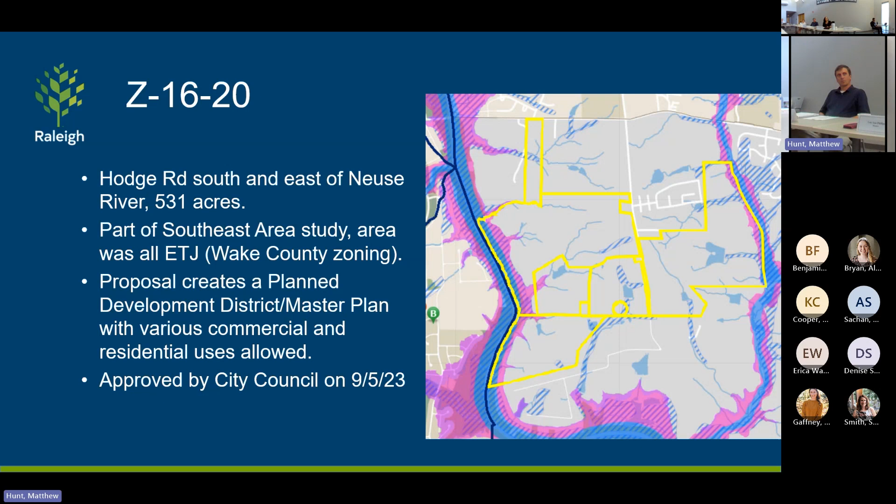The next one is kind of a get-ready-for-the-future type thing. This is gonna be heard at the September 26th Planning Commission. As of now that schedule's not locked in, so it could be out farther, but it's not gonna be any sooner than September 26th. Did I say November or September? September 26th, Planning Commission meeting.

This case is interesting because it's 2 lots, but they're looking to develop together. It's got an old master plan on it from the 90s that shows an 11-lot single family subdivision. This came in 2021 - some of you may recall, we weren't doing these updates like this, but you may remember it. They were looking to develop this more densely, like an R6 issue here. This property is almost entirely floodplain and undeveloped, so they would not be able to get into any of the floodplain area.

With their 2021 application, they were looking to cluster development on this lot. But what they're running into is that the adjoining neighbors, who are not very dense - technically in the ETJ, not in the city, more of a one house per acre development pattern - were not happy about the clustering of R6 townhomes right here, especially this neighbor, which visiting their lot, I can totally see why.

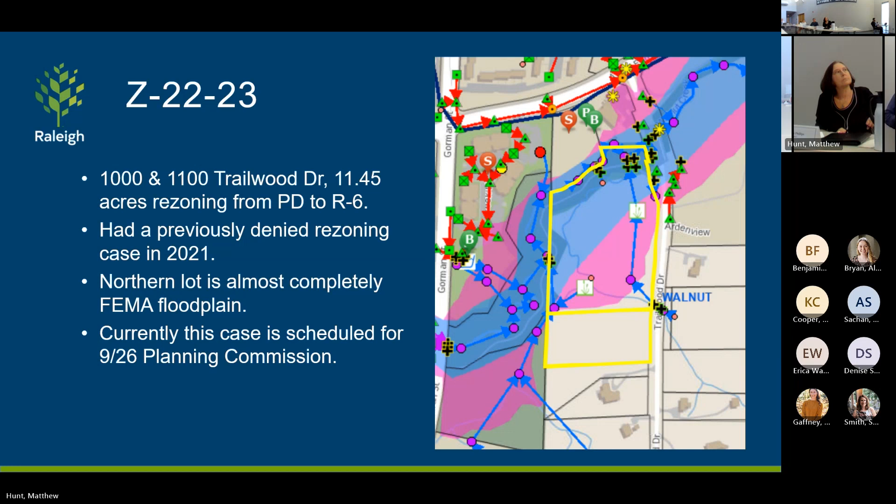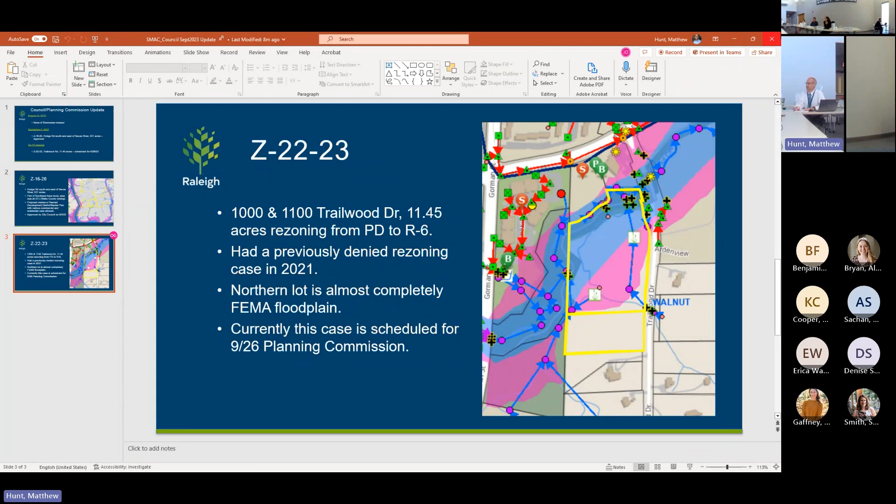Good afternoon, Commissioner. Pleasure to be here this afternoon in support of Wayne and the team. In terms of stormwater staff updates, none to report today, but we hope to bring you good news next time. We have some roles we're in the process of filling as we continue to grow the team and support community stormwater services. Look for those next time. In terms of high priority topics, we've got several items.

I'd like to start by introducing Satwana Purtle, who is here today. She's our new City of Raleigh Emergency Management Director in the fire department. Thanks for joining our team, Satwana. We'd like to bring forward awareness for the commission about the Wake County multi-jurisdictional hazard mitigation plan, which is about to kick off, and we're going to be a participant in this. It's led by the county, but the City of Raleigh and other municipalities within the county are part of that plan. Satwana, I'll turn it over to you for any comments. I think you and your office will be leading that for us, and we'll be supportive of you and the team on that.

Thank you. Hello everyone, my name is Satwana Purtle. I'm the Assistant Director of Emergency Management for the Raleigh Fire Department, and thank you for having me here today. It was brought to my attention that Wake County is in the process of updating their hazard plan. So I reached out to my counterparts, since Wake County has emergency management counterparts, and the information I received is that they did receive a grant to update this plan. They're currently running that information by the state, which is determining how to spend those monies. Once we receive additional information from Wake County, we'll move forward with that process. I identified a couple of points of contact from the Office of Sustainability and our stormwater counterparts to update Raleigh's portion of the plan. If we collectively believe we should incorporate different departments, we'll reach out to them at that time. Additional information should be forthcoming, and I'll look to further collaboration with the team.

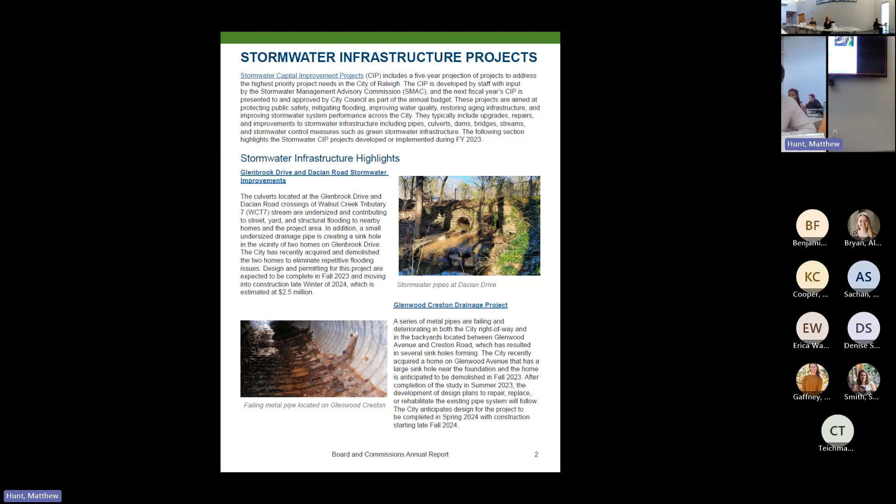So we're here to take any comments first on the annual report for FY23. We can kind of walk through that. Matt has pulled it up for us. Thank you, Matt. So we highlight some of the major projects over this last year. As you can see here, I won't go through those in detail, but we can take any questions on those if you like.

Continue to identify a number of different projects, infrastructure, as well as lake projects. This is the one in process right now, the conversion of the Upper Durant Lake to a wetland system. As we talked last time from Camp Pond, this is Upper Durant, and it's going to be converted from a lake to a wetland. In fact, this was the very first project under the new Lakes policy.

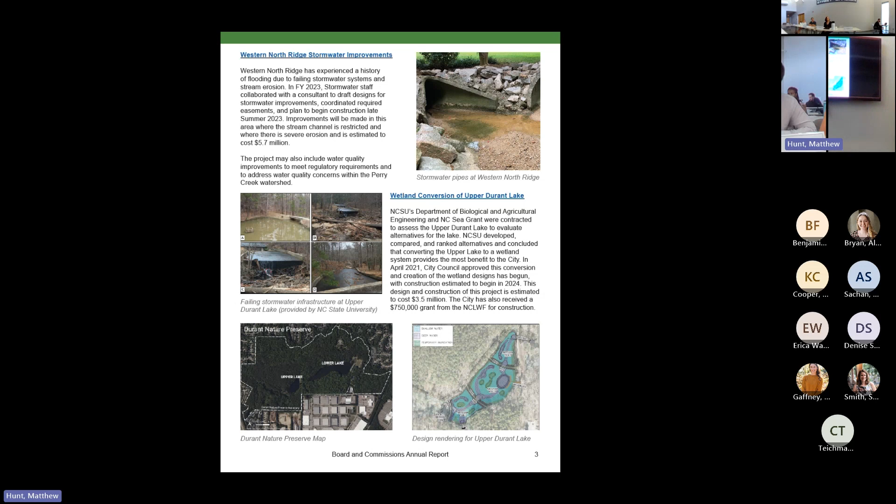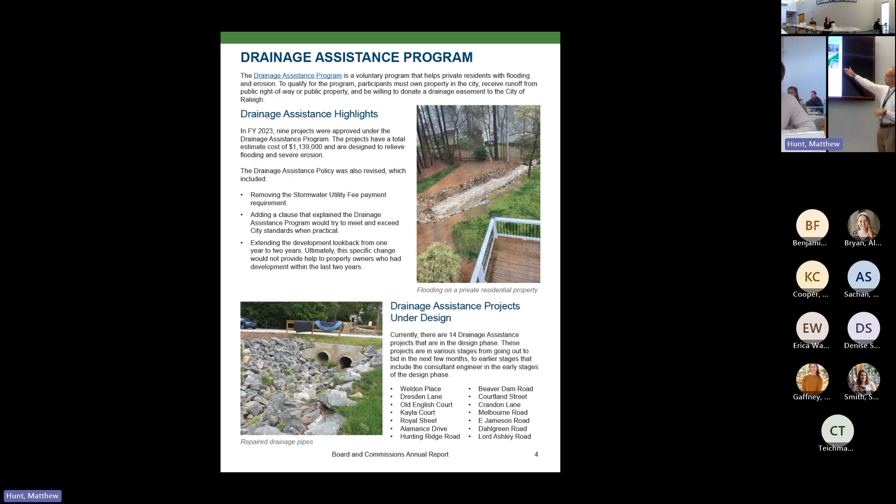The drainage assistance program, of course, we're going to hear about some more projects today from Chaz. That's ongoing good work there, many projects that we're designing. A very new stream stabilization program policy was just approved during fiscal year 23, I believe, Chaz, and the first set of projects there are coming together.

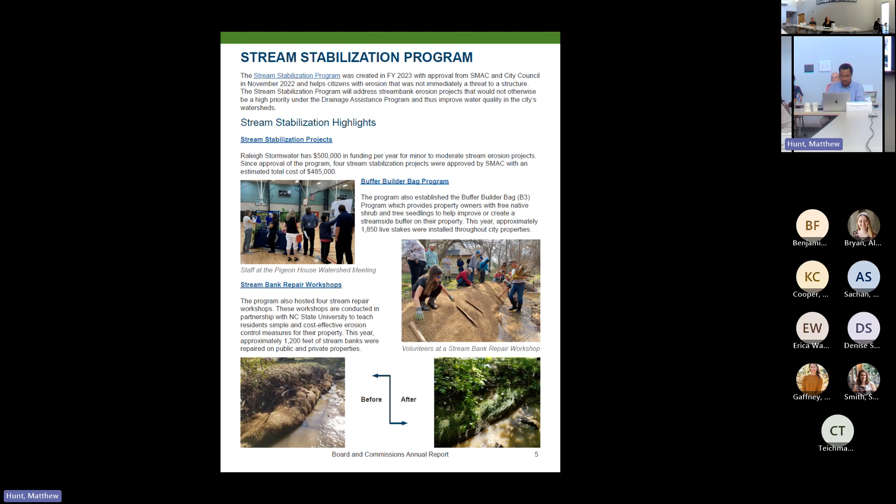More exciting programs here, the buffer builder bag program - say that three times - and stream bank repair workshops. Ariel has really done a fantastic job here with before and after visuals of several of our situations that really are visually impactful. I know a lot came from the water quality team. Hey, Heather, a lot of great water quality work, GSI.

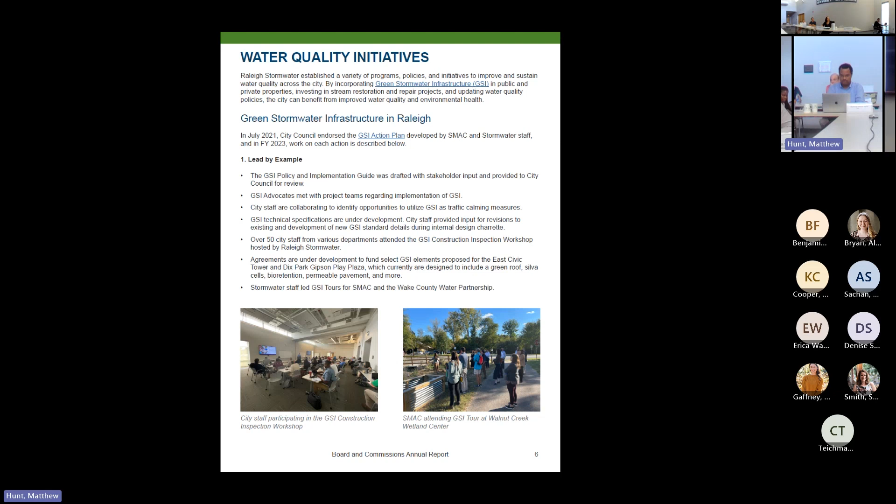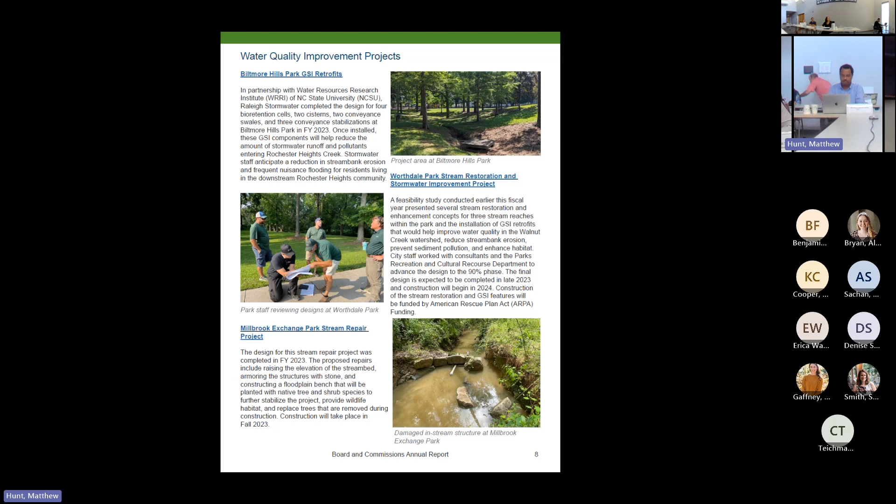Here's the picture of the GSI Tour at Walnut Creek Wetland Center during fiscal year 24. Many items there, we can kind of move through this, but a lot of GSI related water quality work. I hope what you see is one theme here: the integrated program is what we're pursuing - water quantity, dealing with flooding hazards, water quality, GSI emphasis, equitable emphasis across our program as well, and all these services that we're doing.

Another excellent before and after example - we'll say this is after here, so this is a rendering. So if we were projecting this, it's going to look like this or very close to that.

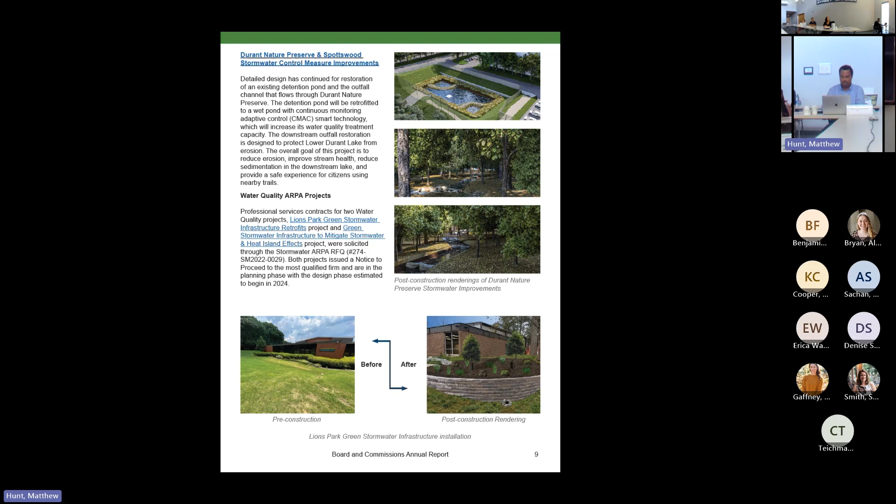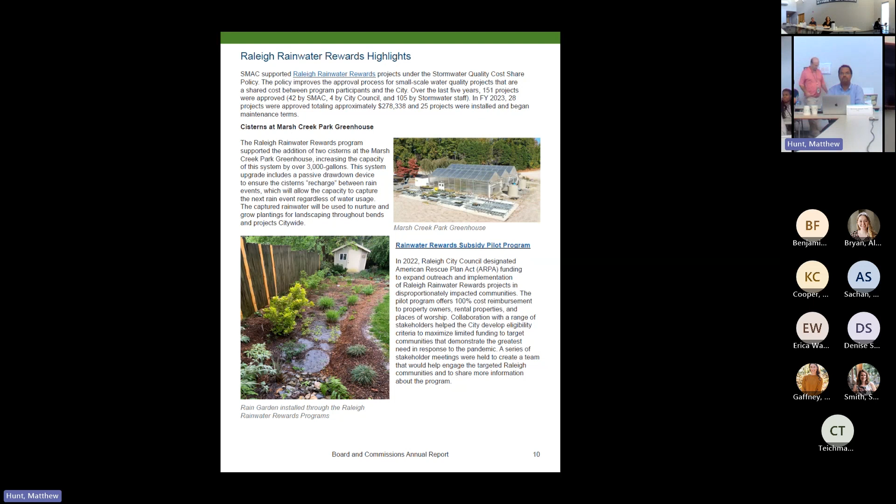Raleigh Rainwater Rewards - again, this continues to be a very well-received program, but we're also getting interest from others outside of Raleigh about this type of program. Even as far away as Tempe, Arizona is asking about it. So really an excellent program for Raleigh Rainwater Rewards.

We do have still what we consider a modest stormwater utility fee that supports all of this. That's the section around the utility fee, and it was adjusted slightly for fiscal year 23.

The Alluvial Decoder on Crabtree Creek there really raising the awareness of flooding hazards, in this case for Crabtree Creek, but a very well received display out there near the Crabtree area.

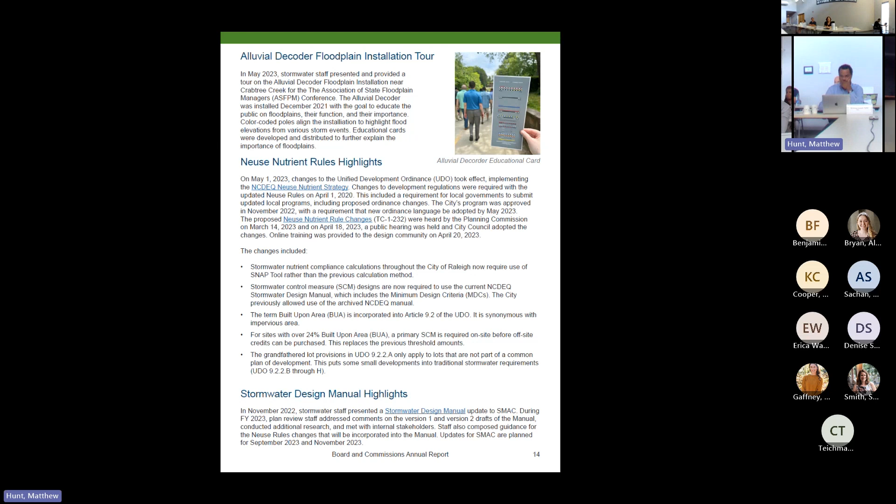Before and after here, some of the great work in managing stormwater control measures around the city. The city improvements here we're making.

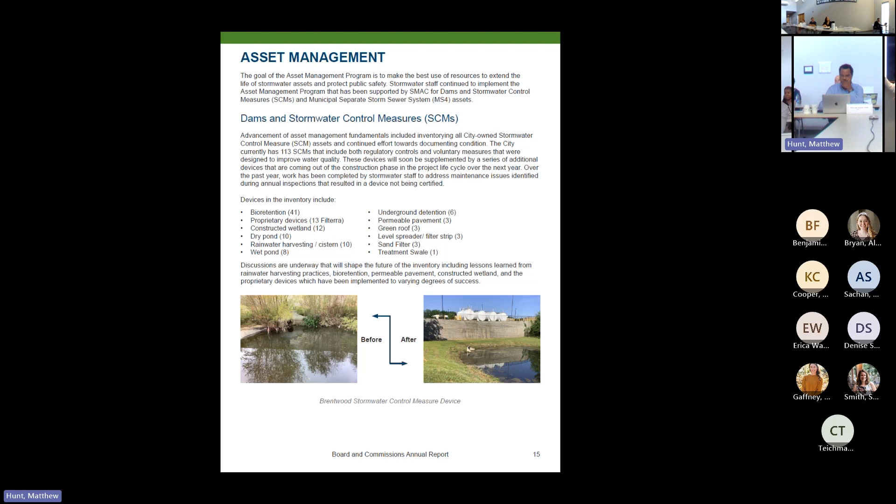All right, MS4, municipal separate storm sewer system. Let's go through that one.

Asset management, doing a lot with identifying what these assets are, what their condition is, and prioritizing the repair work, and trying to make those repairs at just the right time, not too early, not too late, but just at the right time. That helps us to make sure that it's functional, first and foremost, but also optimizes the cost for our assets. A lot of great work by the asset management team.

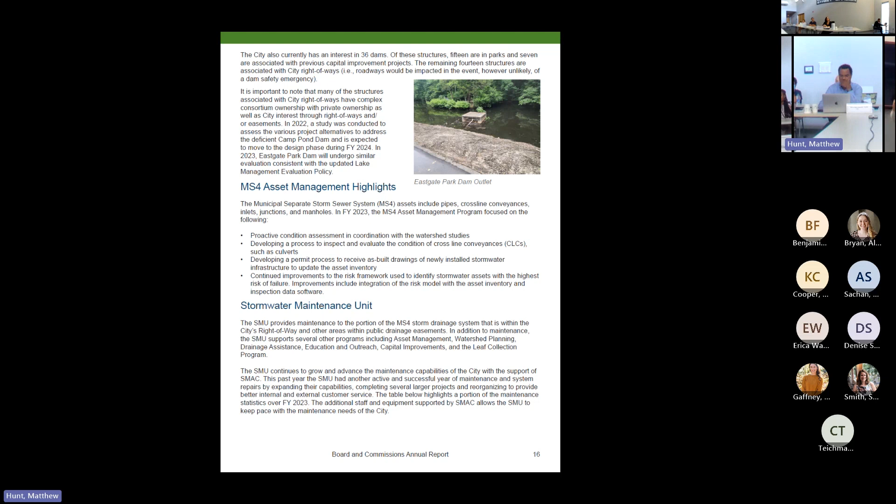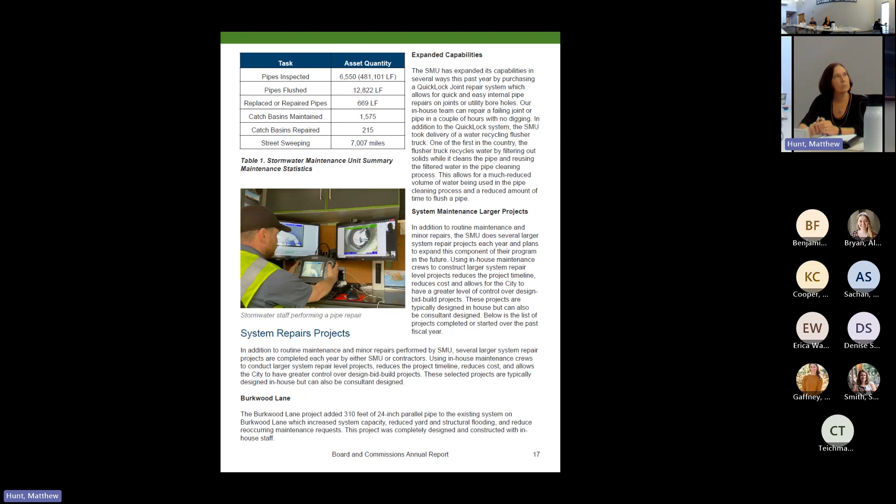Of course, our stormwater maintenance partners housed here in this facility, doing a great job with all of their equipment and their assets to repair the system and maintain the system. Thank you, Matt. We're just scrolling through this, perfect.

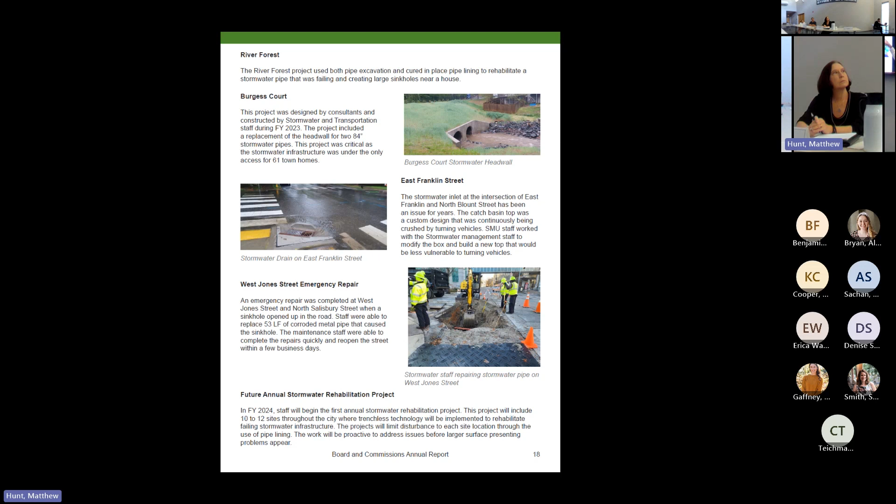Part of our team, watershed planning. A lot of our work in engaging residents in the community about what we can do over time to make improvements. A lot of really good engagement taking place there.

Education and outreach. Lots of education and outreach. We really want to highlight the commission's engagement in all of that work.

Schools, internship programs. You heard from Alex Lynn, our most recent intern for Partnership Raleigh. The cohorts are featured there in the 2023 program and really just doing a great job of intern support, and our commission. So we'll have an updated photograph after the meeting, if that's convenient for you all, we'll get that inserted here. Comments on the annual report, anything that we missed, or do you like the way it's presented?

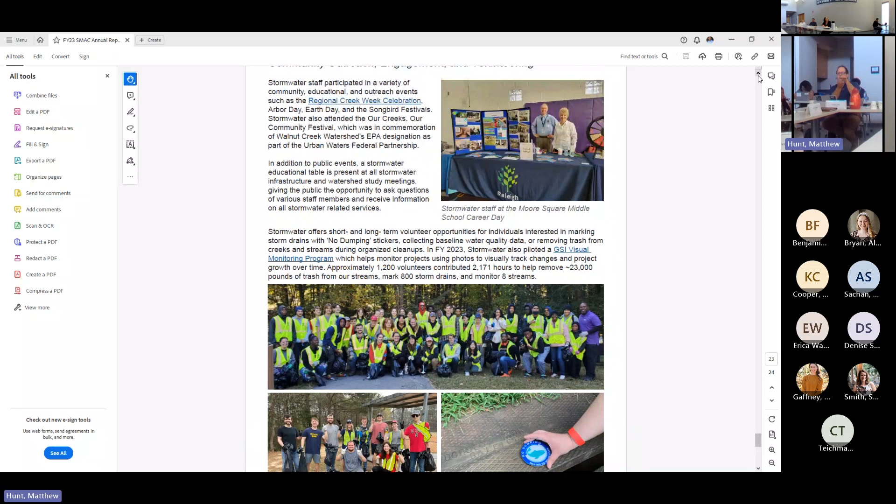This is excellent, you've done great work here. I get lost in it a little bit, there's so much good stuff in there. Is there a table of contents, or a way to group that? Like at the end, it's board of commission members, internships, and rain barrels - but are they as important as water quality and drainage system? So trying to figure out how it's all clustered, give me a direction in the front, a table of contents, so I know what I'm seeing and don't get lost.

It could be like a two-pager, just a table of contents with those pieces in there. I think that's great feedback. The template we're working from is a general citywide template for boards and commissions, but we have flexibility to make it fit SMAC's desires. I think that's a good idea too.

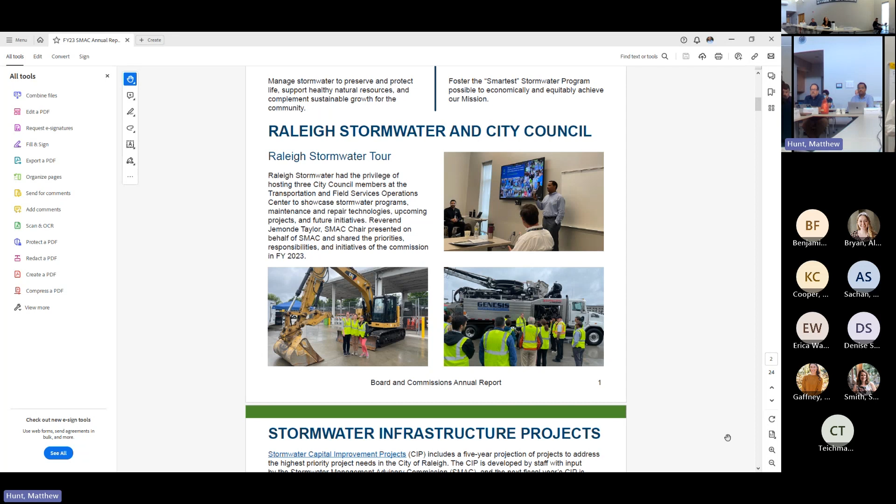So we'll work on the table of contents or some other way to orient the reader to the document, because it is a pretty significant document - it's 24 pages, significantly longer than last year's, and with a lot more pictures. Yeah, I'm on page 12 and I'm like, where am I supposed to go?

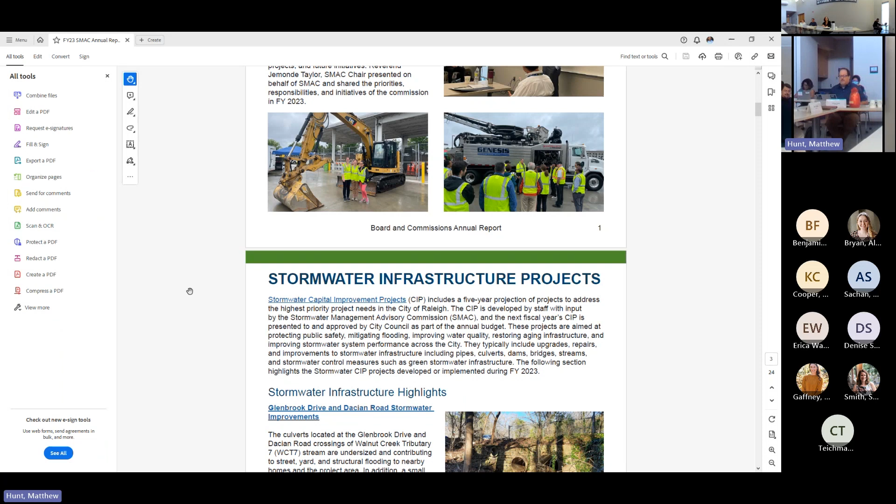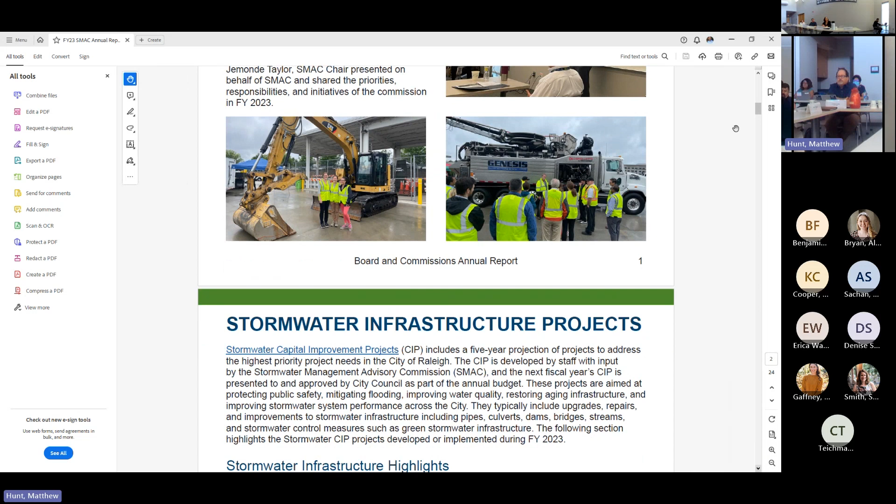That's good, I'll definitely have it. There's great suggestions, we'll make it even better. Other comments - the goal of this was to make it representative across the entire stormwater program, all the activities of the commission and across all of our programs. It'll definitely be better to give some summaries of the total picture that y'all mentioned, and orientation to where items are.

Great feedback, outstanding job there. So much work - take a couple years off! This is a great area, thank you for leading that. It's a pleasure to be part of such an effort.

It's guided by commissions. I just want to add, as a new member, this was super helpful for me to orient to all the things going on, and I can see how much work - visible and invisible - is happening. So thank you. One thing that stood out to me as potentially an area for growth, and I know a lot of attention from all of us is going towards it,

is making that equity framework visible in the other pages that aren't just the equity page. I think the equity page does a beautiful job outlining the plans and next steps, especially with the Raleigh Rainwater Rewards. But it'd be great to see that attention to equity in the other programs too, whether it be project selection or community outreach - showing up in places that aren't just on that one page. But I think that's room for growth, and it was fantastic. Thank you.

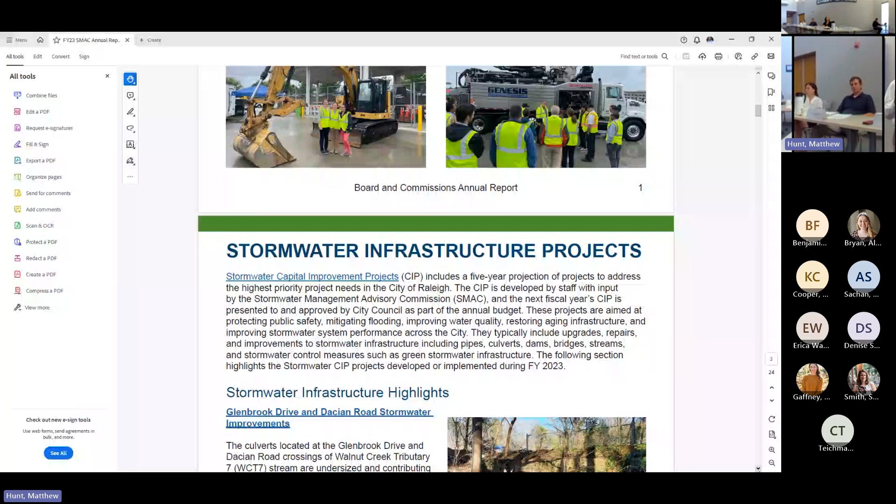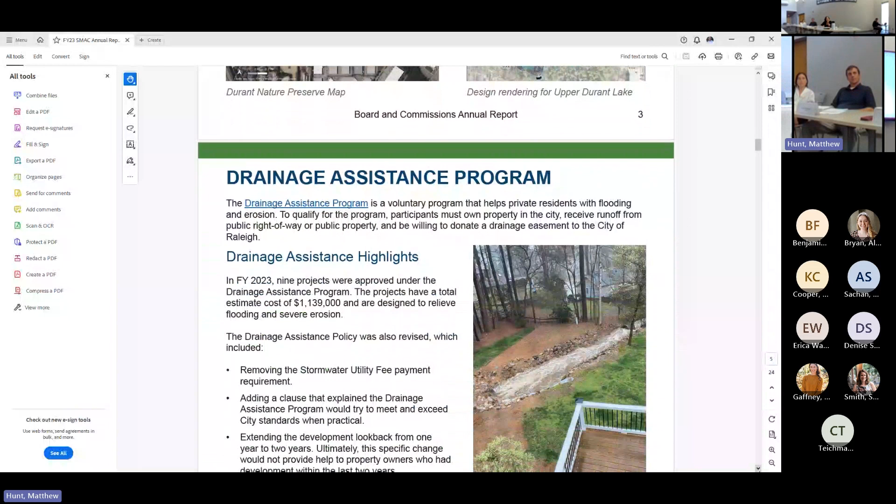Other comments? We will work on those revisions and improvements and send you all a revised draft as soon as we can, and put that over email. Ariel, this might be ready by tomorrow morning, or maybe next week.

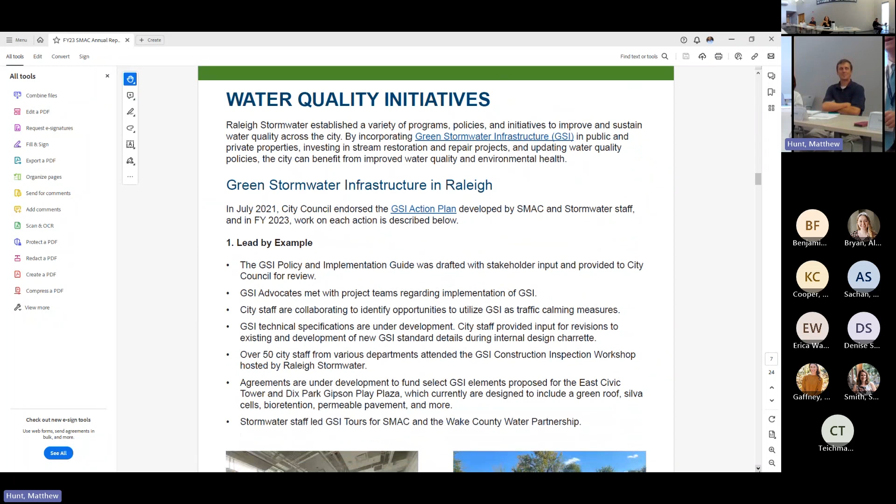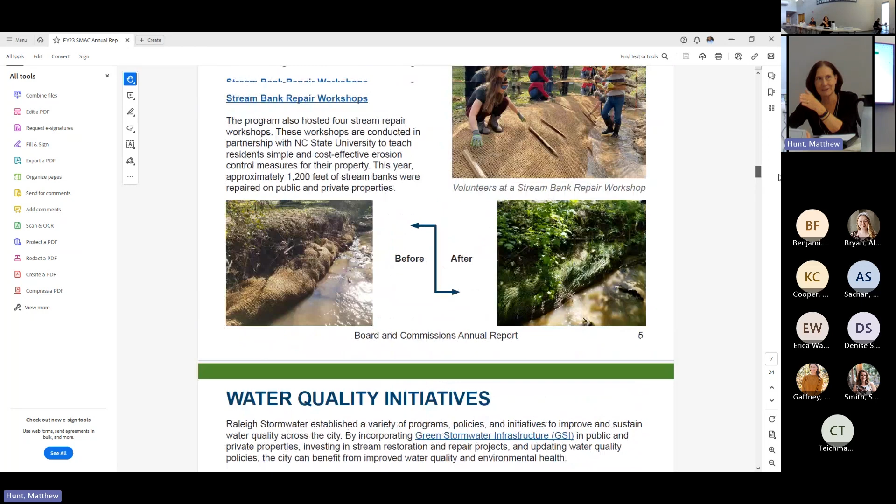I did have another thing, where you were showing the statistics on the maintenance unit. Those are impressive, but you could show the previous year too, to have 2 or 3 columns and show improvement. That would be great to show trends.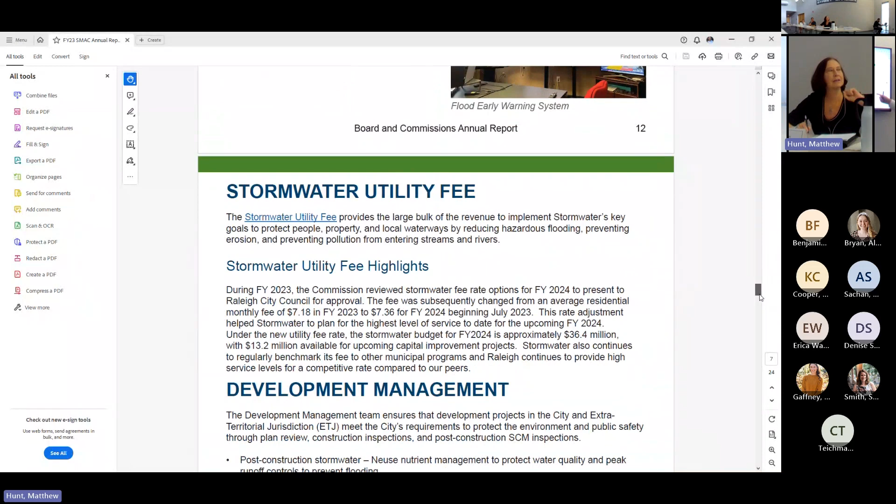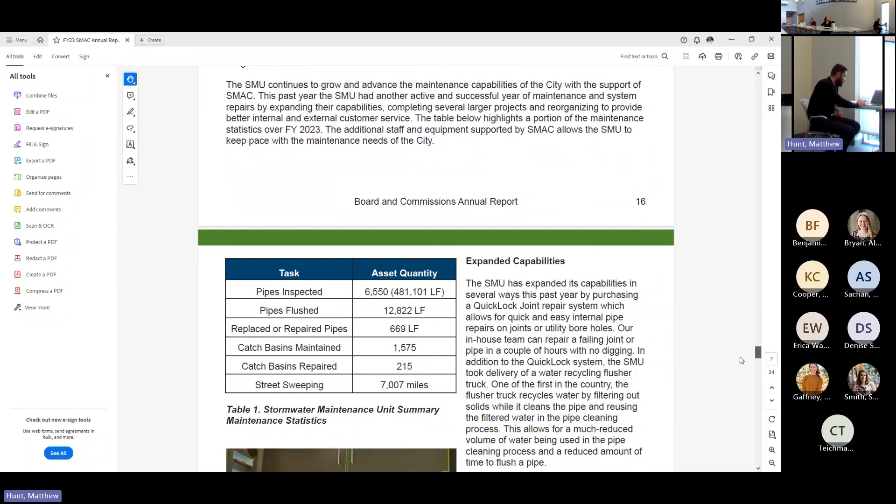Yeah, we've got essentially all of that on page 17, I think. Our maintenance team, we should be able to pull that from Cityworks. Yeah, it's like our summary of work over time. Yeah, the information right there is great.

I'll definitely add it, thank you. We're very good to work on that. It's wonderful to show these trends, and we could even incorporate that over time for all of our programs, if you'd like, to show improvements and trends.

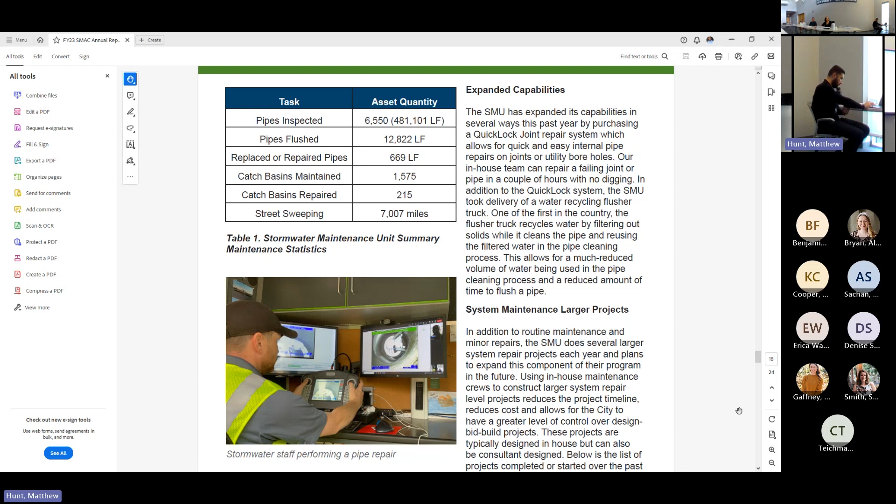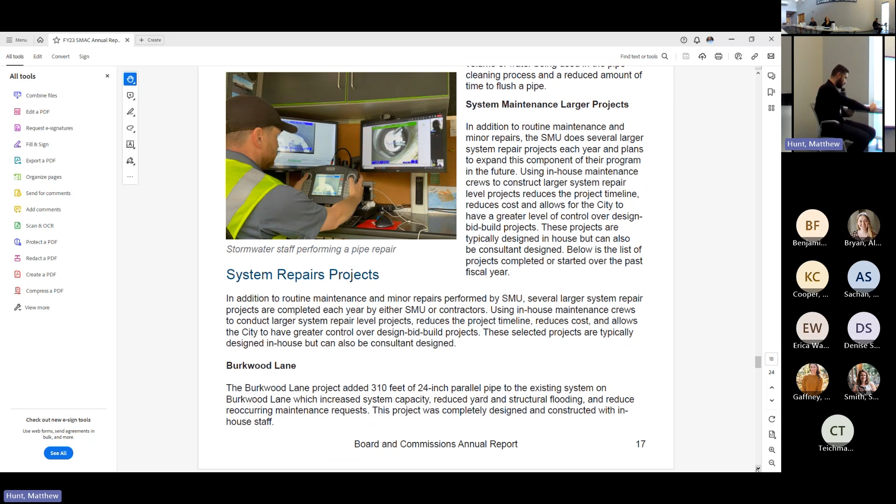And as we capture more nitrogen, for example, how we're doing that over time and reducing flooding hazards, things like that. We've got a number of those items in our key performance indicators for stormwater, which we may want to bring back a presentation on in the future, and we could include that here.

I think that's an interesting way to go, somewhere at the end of this. It ties into the city's overall climate action plan and all these things. If you're tracking certain performance indicators, you could put some cool page graphics, a stormwater-focused tear sheet a city councilor can take, with conversation pieces that show what we're doing as a city around this.

Thank you, we're planning for that. We do have a pretty broad set of key performance indicators for stormwater that rolls up into our departmental business plan, and then that rolls under our City of Raleigh strategic plan. That's all connected together.

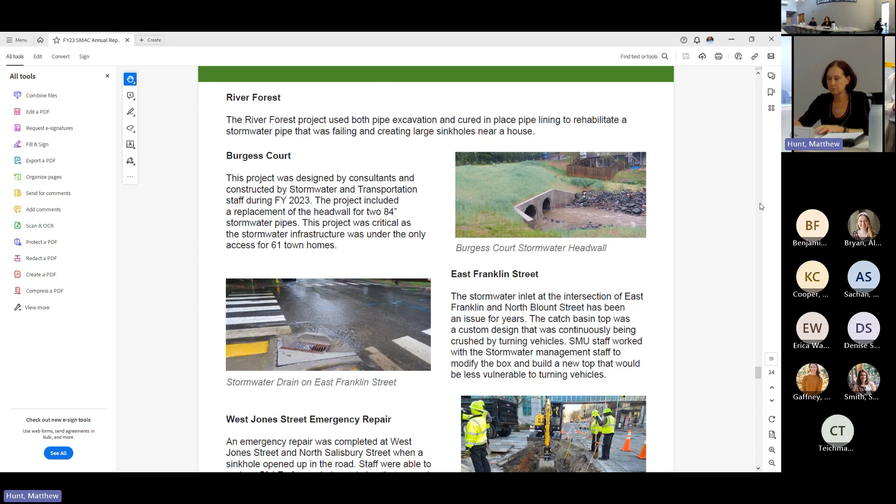We'll move now to the annual work plan, looking ahead for fiscal year 24, which we're just into now as of July 1st, and we're already off and running. Some of the things we're proposing to put into your FY24 work plan, you're already working on, so it's work in progress. We'll do the same thing here.

This is very much just a first draft. Wayne and the staff team's ideas on initiatives that we knew were already important to the commission, as well as things we were projecting for the next year or so. There's one new section to this work plan, two things actually new.

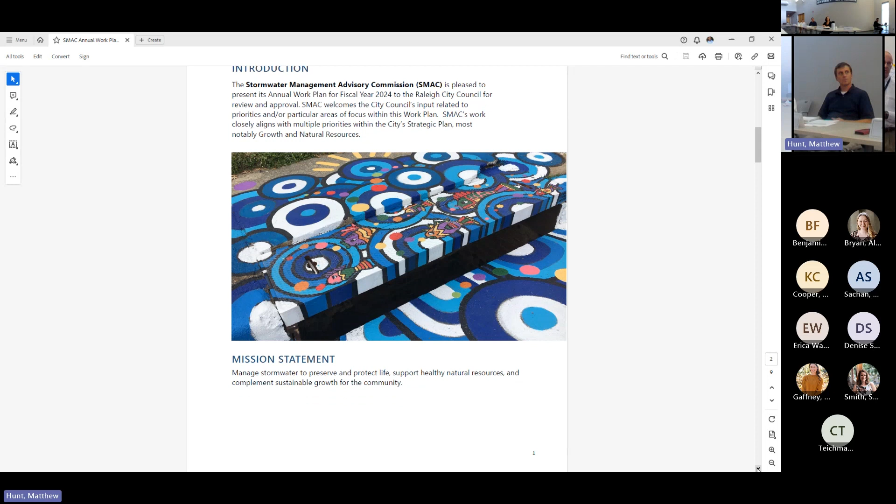With Errol's help again, we have a template from our community engagement office, so we have a new template for the look of this work plan. That's number one. The second thing we'd potentially like to add is what are the highest priorities for the commission for FY24.

As you know, your work plan is very robust, often multi-year in nature. So we thought it might be helpful right up front to think about priority work items for this fiscal year 24. That's a new addition to the plan this year, and then we mention the rest of the plan, the comprehensive themes, in the document as well.

Just to get started on this, get back real quick. Okay, did you get back to this? Oh, by the way, we did get a comment that this was a nice feature.

I agree, and so perhaps we want to extend these awareness opportunities, or art opportunities, to other storm drains. So that could be something we amplify, and see if we want to comment on that already, or at least put a reference to where that is. So, caption - oh, good note.

Is that Nashville? Yes. I didn't think this was in Nashville. We'll get it done.

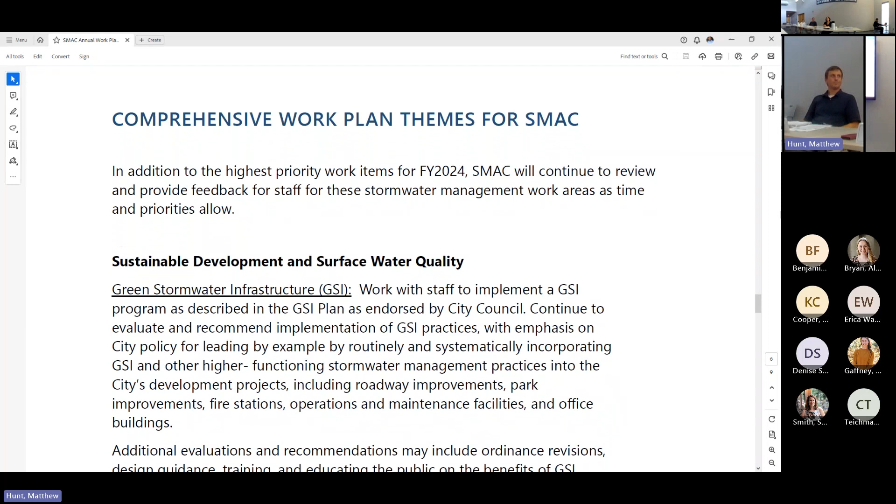So we potentially see those as maybe priority items for the commission for '24. This lists the rest of the portfolio, and items above don't link in with these by any means -- oftentimes they do, but this just gives more of the story for what we're doing.

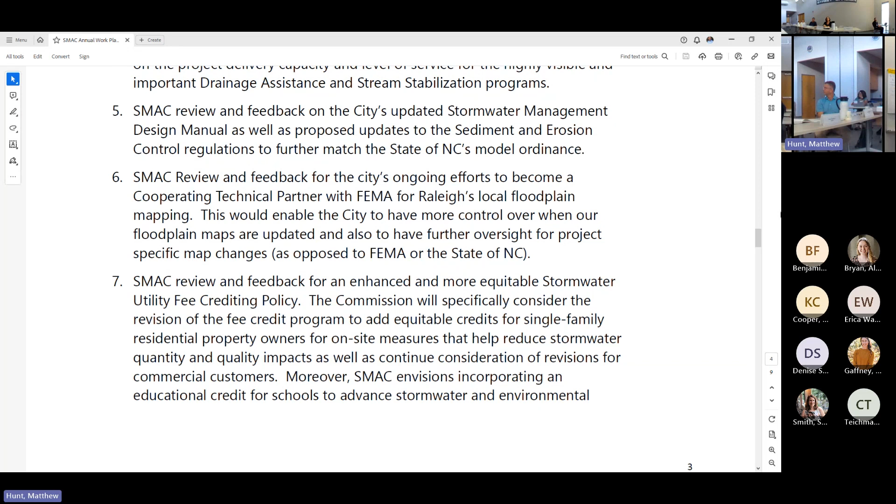Are you set up about the FEMA line? Are you trying to do what Mecklenburg County's doing? Yes, separate your own, yes. Mecklenburg County, you have to be in charge of that. Yeah, that's what Mecklenburg County is doing. Yes, so we do the repository for mapping, map updates, and we process all the map revisions.

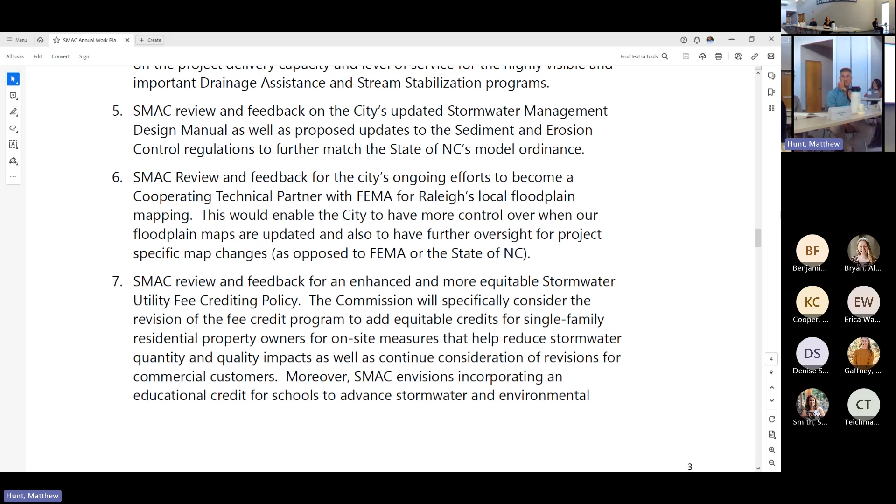Exactly, that's our vision, to have that program like that for all. It provides really the benefits of more timely floodplain mapping. I think a lot of reviews of floodplain permits can be handled right here locally, more benefits as well.

Can you share a little more about the role of SMAC in the MS4 permit review? It sounds like the public comment period just closed, so we're looking towards the finalization of that permit. What is the kind of role of SMAC in that process? Yes, yes, I might need some help from someone from the water quality team on that one.

I don't think we'll speak to that directly -- it's going to be language, just a text review, to see changes between the old permit. The other thing too is we really write the stormwater management plan, which looks at that permit umbrella. We often have a lot of flexibility in how we do that, and that's really where the commission's input is very vital.

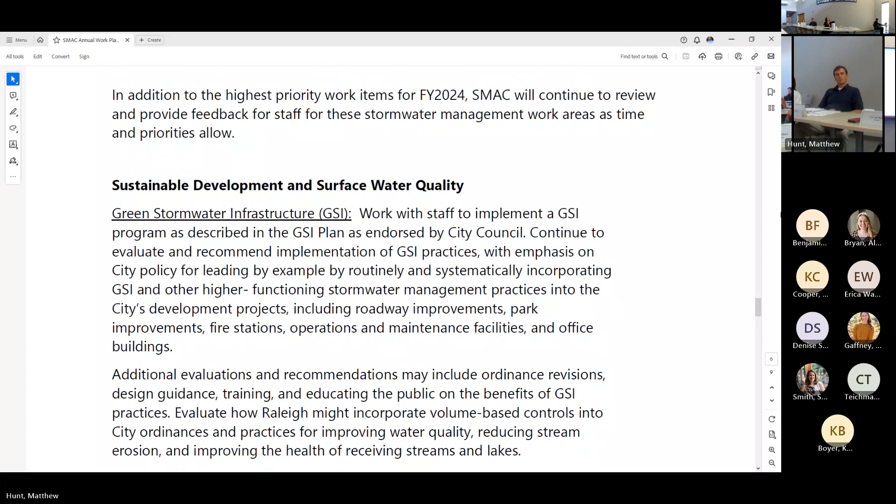That's definitely more in our purview, writing that permit. Oftentimes negotiations will come based upon state requirements, and we can then write our management plan for approval by the state, consistent with the permit.

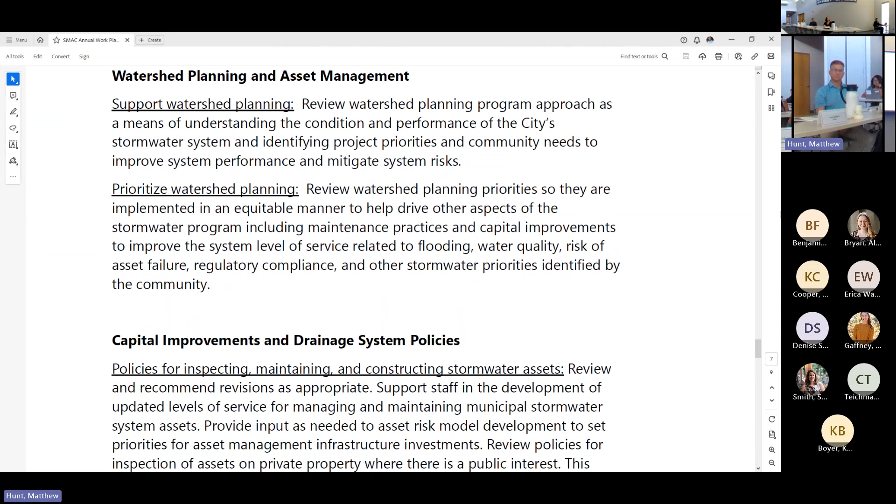Any stormwater priority themes that we may have missed for priorities for '24? We tried to think about a work plan that would maybe stretch us, but at the same time not overstretch us. That was part of the reason for breaking down the priority items versus the rest of the work plan.

It attracts more focus. These other items we will continue to provide updates on as we go -- what we're calling regulatory programs, and so on and so forth. I've already made these notes right here: attention to equity.

Great, Scott, thank you for all the effort. The question I have for the commission, this is our work plan. It has SMAC at the top, SMAC is woven throughout. Staff did a lot of work on this.

How can we as a commission have more ownership? One of the things we started earlier this year, it didn't last long, is that at each meeting we had the work plan in front of us. I feel like, and this is my fourth cycle, that we do this, and then it's a pause, and we come around this time next year, new fiscal year 25 work plan. And I feel that we as a commission can have more ownership around it.

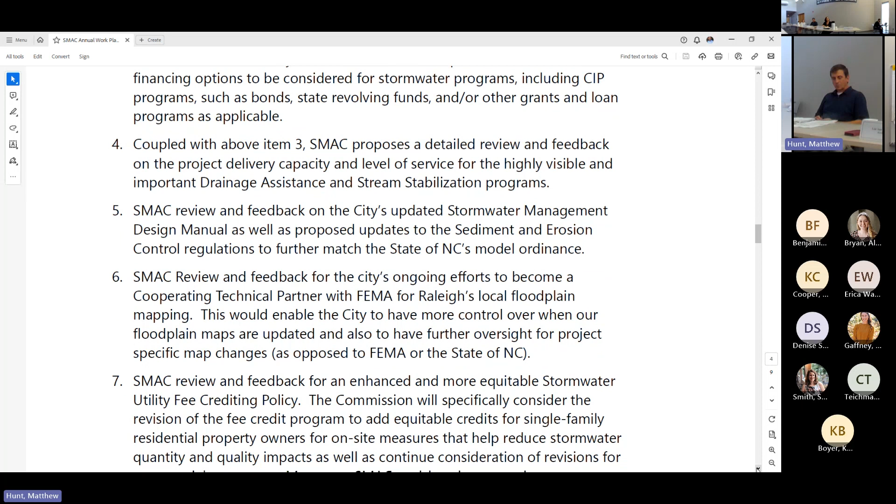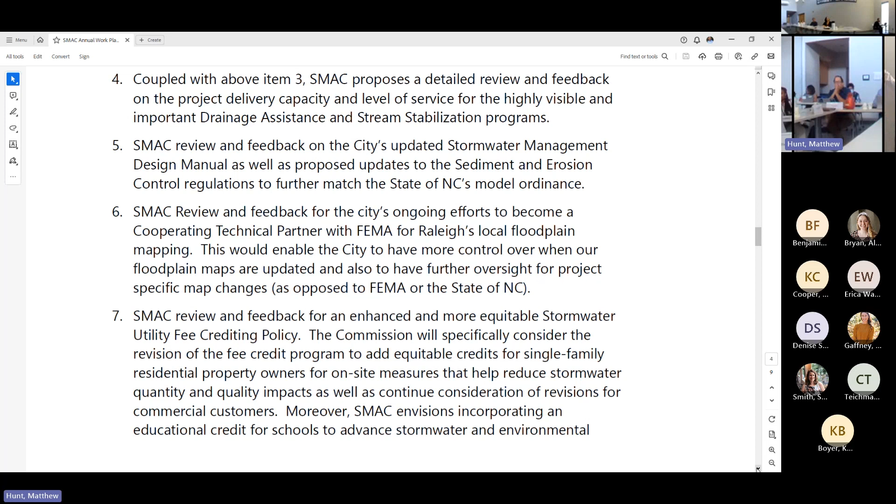We added item 4 as requested several months ago by the commission. Right now, this presentation is planning to come back to the commission around November with our drainage assistance program, our capacity, our delivery, resources, that type of thing. So that's a separate item, but it really ties into budget ultimately.

Design manuals on 5, floodplain program 6, credit program 7, 8 are all the ongoing projects.

Part of number 8, you have a method for tracking. You go back to these projects a year later, see if they're still functioning. Have they improved the situation? That's a great note. As we do drainage assistance and stream projects, we're getting easements on those, so they become part of the city system, and we're responsible for that. In terms of a more formal assessment, perhaps that's something we could amplify, making sure they function and perform as designed in perpetuity. A more formal assessment of how they were performing might lead to changes in design. Some of it, like rain gardens, has to be inspected occasionally, but some of these pipes and things maybe just someone goes by once a year to make sure everything's still functioning as designed. This is the type of review we mean.

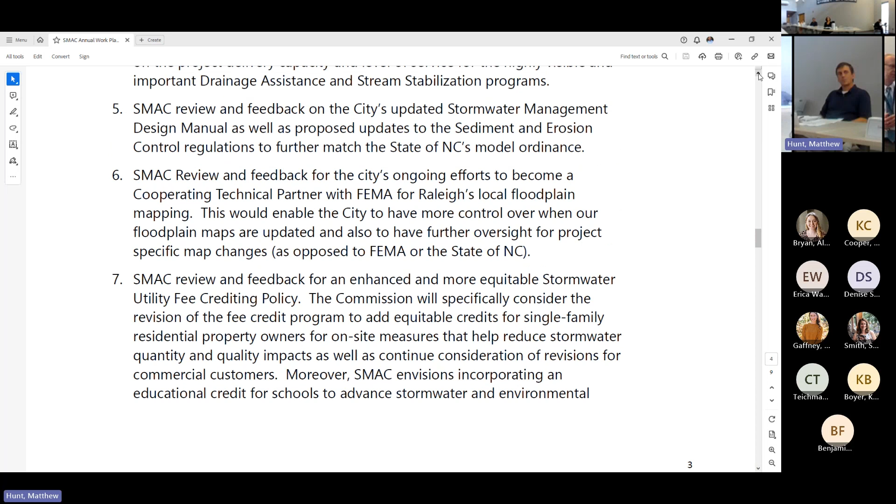That's among the items of the commission's review and approval, for example, talk about the bond program. I would say yes, at least I think Parks and Rec Commission has been an enabled body that created some committees geared towards that as well, because they are not city staff, a different lens in which the bond project could be guided. I think that's another topic, in fact even today we're meeting and talking about that very topic with our finance department. We continue to plan on that in the next year or two. So yeah, the commission, I think that would be a great way to amplify the importance of those projects with community, with the commission involved.

Lots of things. You're going to turn this next draft around by tomorrow, but you'll probably beat me to that, but this is great. As you mentioned, this is the commission's work plan, these are some ideas from staff for your consideration. We can update it however you want, take as much time, it's your document.

Just a comment on the subgroup, I don't think our bylaws stipulate how that's formed because it's time certain. I don't think it speaks specifically, but certainly you can appoint those, and whatever period of time, those groups would report back to the full commission with a recommendation. Yeah, I think the only times I can remember are the GSI and the project prioritization. These would be great.

Now, your plan is to present this at the October 3rd commission meeting, then the city council meeting, if it's acceptable after we incorporate the improvements from the commission today. We'll send that back out to you. We could even receive comments in between meetings from you all, keep everybody in the loop, and make changes based upon that. We won't take it to the council until you, Commissioner, accept it. You have to move forward, but we meet after the council meeting.

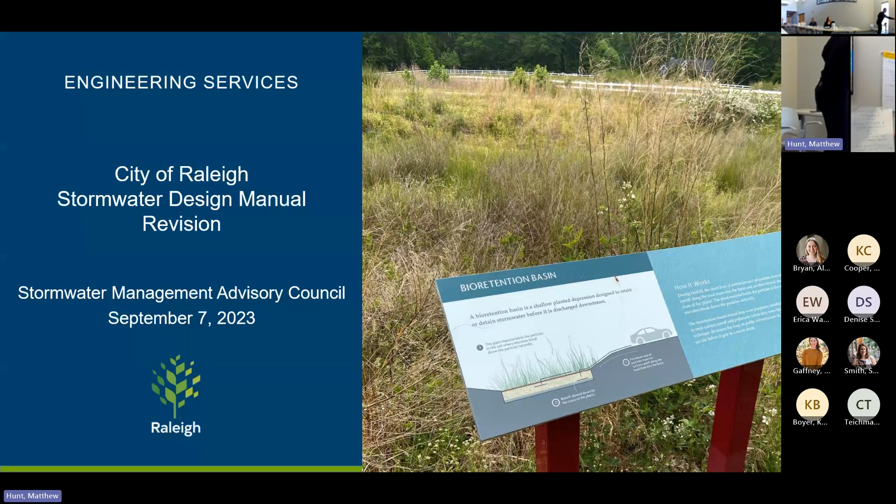I'll be giving you an update on the Stormwater Design Manual project that's been going on since before I started in the city. I've taken over this project about a year ago. So the focus today: I'm going to go over the current timeline, talk about the overall document changes, talk about some specific requirement changes by chapter, and then talk about next steps for this group.

So this is similar to what you saw last fall, but it has shifted by 3 months. Basically, we took 3 months longer in the internal process, so all of these things shifted by 3 months. So instead of taking it to council in say September, we're taking it in November.

There's some key dates I want to go over. The public review period started 2 days ago and continues - we're leaving it open if anybody wants to review it on the weekend - through Sunday, October 2nd. We will be back here in 2 months to talk to you about any changes that have been made between what went out for public comment and what is the final draft manual on November 2nd.

That is what we are going to request, that you request an authorization change from council, to start the process of adopting the new manual. Then we anticipate it going to city council in November. We would hope that city council would then refer it to the planning commission, who would refer it to the text change committee. So that's the outline of how we think that might work after it goes to council.

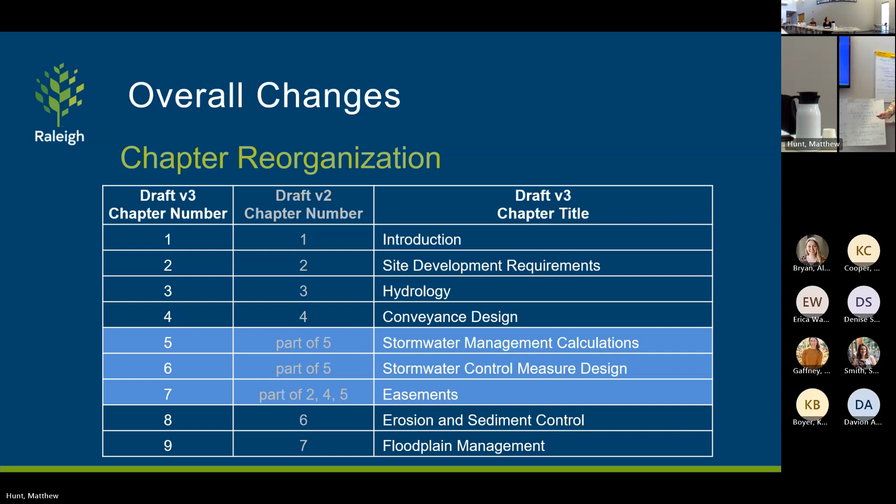I'm going to go through some requirements. I'm going to try to highlight things. Again, these are just the things that changed.

So this is the requirement. This column didn't change between our existing currently effective design manual and what was previously publicly released in version 1 and version 2. So were we changing things to begin with? And then have we changed it from what was previously publicly released in 2020, 2021 to what went out earlier this week?

For example, version 1 introduced a new process called the lot grading plan, which was intended to address infill development. But the way it was written, it could have applied to development of single family homes at any scale. So we clarified that it's really for single family, house by house development or infill small subdivisions. It's not for the 1,000 home subdivision.

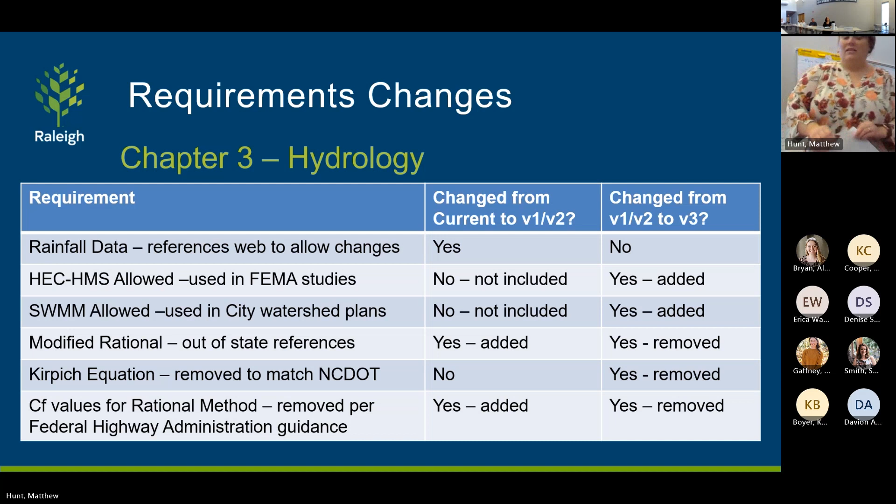All right, chapter 4, I have 2 screens about, and that's because stormwater conveyance design, designing pipes and swales and inlets and that sort of thing, is something that's not addressed in the UDO. The requirements are all in the design manual. So there's more meaty content here, I guess I would say.

So the first thing here is that we are being explicit about an HGL, which relates to how big the pipe is. What we're doing reflects current practice and general professional practice, but it wasn't in the existing manual, so we're clarifying that. The second two items, the 25-year design storm for large drainage areas and basing inlet and gutter spread on the 10-year storm, both of those were in version 1 and are not changed. Those are more conservative requirements than in our currently active manual, and we have gotten comments on both of those items.

This screen is new changes to chapter 4. So, and actually this first one we're clarifying. It should have said this was changed in the previous one. We're clarifying what we mean in terms of upgrading existing systems with redevelopment. That's both in terms of capacity and condition.

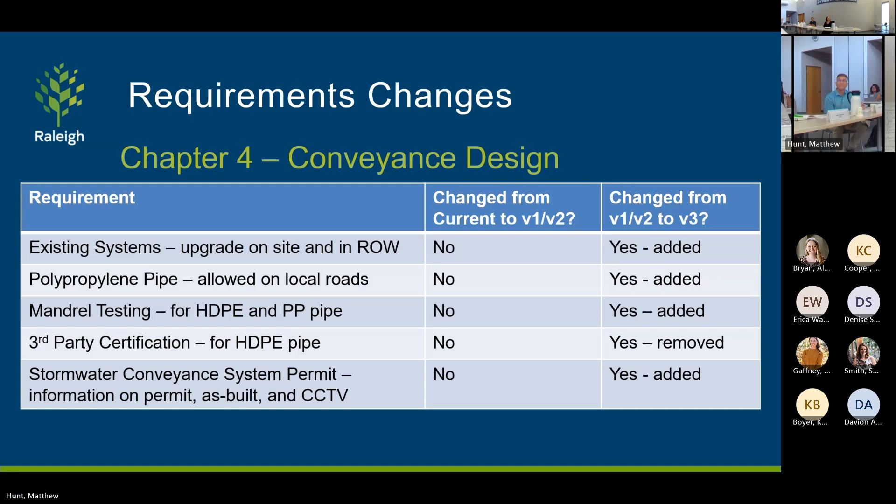Anything else on chapter 4? Chapter 5, which is the newly split out stormwater management calcs.

The new nutrient reduction calculation method is tied to the Neuse rules, which changed on May 1st of this year. We currently have written guidance on our website about how designers can submit things to meet those rules, and we're taking that and incorporating it into the manual.

The second item is about the peak discharge design storm. The current requirement is the 2-year storm and the 10-year storm. Version 1 proposed changing from the 2-year storm to the 1-year storm, because we anticipated NCDEQ was going to require that as part of the Neuse rules. They changed course and did not require that, so we're going to stick with the 2-year storm at this time.

These next two changes actually don't show up in the manual, but we've listed them as changes we anticipate making because they would be UDO changes. The first is about built area in the watershed overlay districts. There are several areas in town that have additional requirements beyond those throughout the city—the Falls Lake overlay district and the Swift Creek overlay district are two of those.

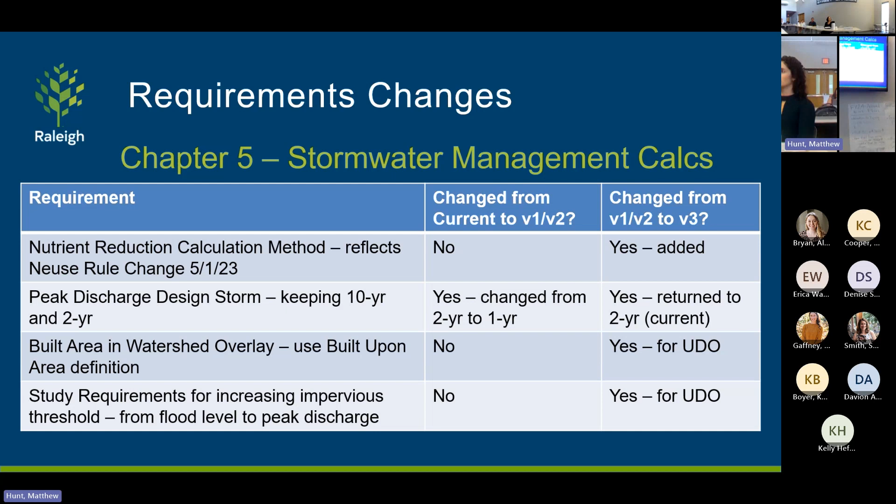All right, moving on to stormwater control measure design. We have added some more specific things. For example, we have added more specific requirements for underground stormwater control measures. Those aren't addressed in the state manual that we reference, so we want to add information on that.

We've also added information about pond embankments and freeboard, which gets into the embankment height, about proximity to buildings and retaining walls. All of these requirements tie into things that could be more impactful to public safety, and that's why we're being more specific on those items than we might be on others.

For example, we currently allow SCMs under parking decks, but we're going to require additional information than what we currently require. For example, we'll require that there's a leak testing specification, because almost anything you put underground is going to leak at some rate, so we're going to require that you specify what is an acceptable leak rate.

I want to highlight the invasive plants. Currently that's not addressed in our manual. We've worked with our colleagues in urban forestry, and what we'll be doing is referencing an NC State Extension website that identifies whether a specific species is invasive in North Carolina. So we're not specifically saying what plants you have to use, but we're saying certain plants can't be used in the SCM footprint.

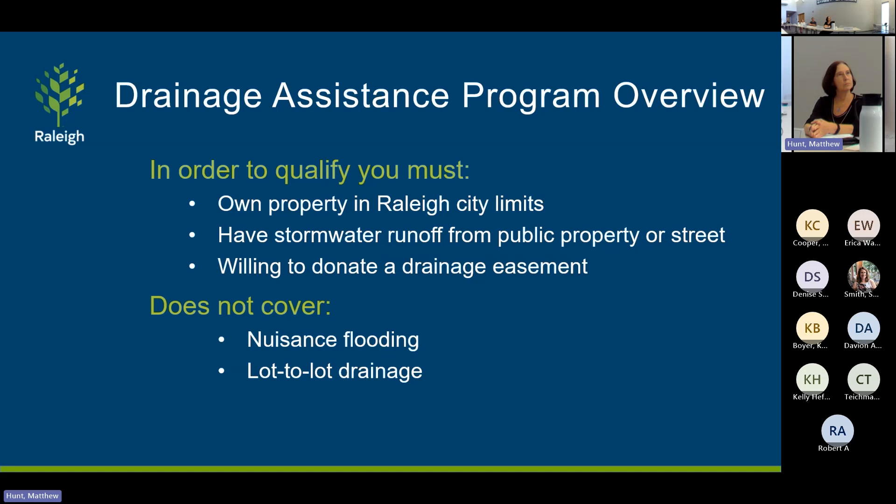We have about 1.25 million in annual funding that is allotted. Oftentimes we're not spending it in this fiscal year, oftentimes in future fiscal years. With that, we fund about 8 projects per year, and funding is based on their ranking in the prioritization model. The 2 projects that we have today for drainage systems are Frank Street and Fairfax Drive.

You see 20 projects over here. There's 100 projects on the list. I know we've talked about in previous SMAC meetings about how do we reduce that number, be good stewards to our citizens. And these 2 projects actually are going to show how we are doing it.

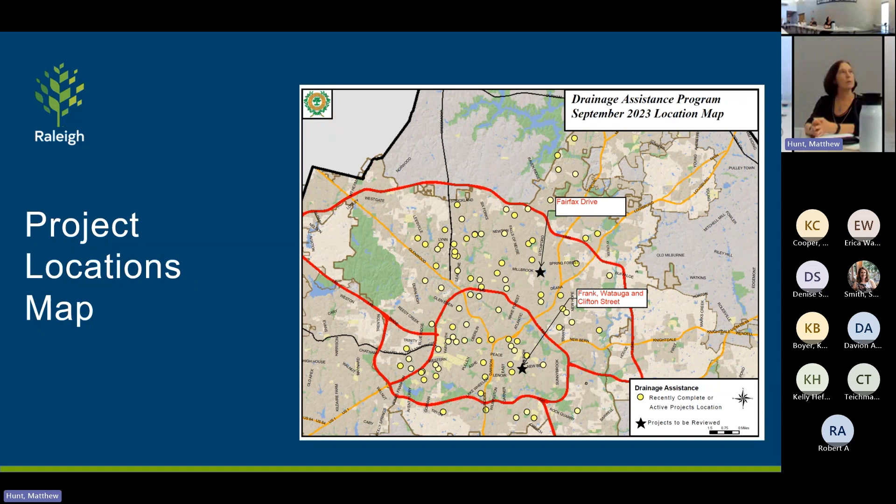So the first project that we'll talk about is really 3 projects almost in one. We're combining them as a way to reduce that number: Frank, Watauga, and Clifton Street, east of downtown a little bit, and then Fairfax Drive up in the northeast. So the first project that we had is 508, 510 Frank Street - that's right here, 508 on the left, 510 on the right. And then we have 1235 Clifton Street and 1232 Watauga Street.

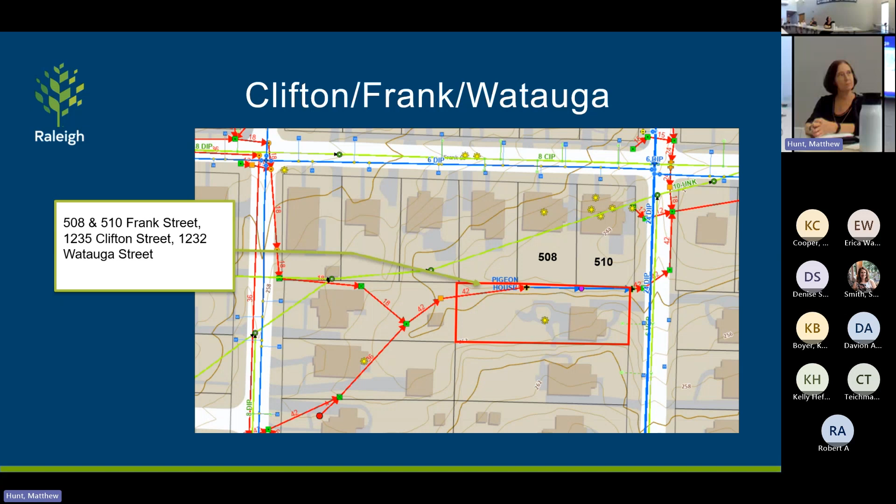What is going on here is that on Frank Street there is flooding, and you'll see some pictures in the next slides about the flooding that's going on in the structure and in the yard. There's a retaining wall right around the border of 510, part of 508, and 1235 Clifton Street - it's in poor condition, to say the least. And then there's a sinkhole at 1232 Watauga Street.

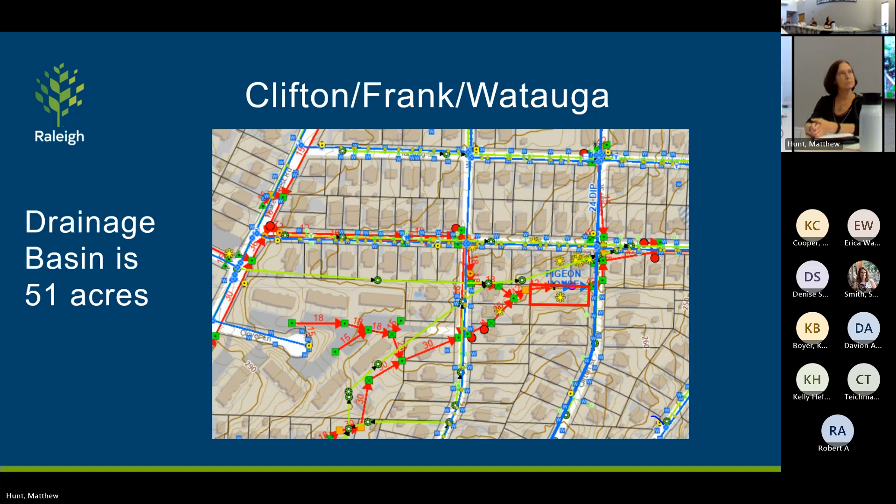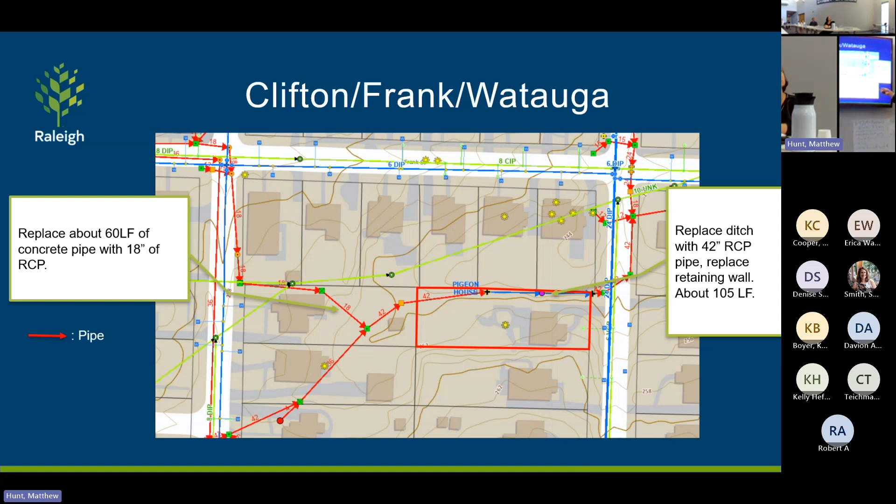So the proposed solution would be to clear that ditch out, replace the retaining wall, about 105 linear feet. We will run a hydraulic analysis to confirm that that is the efficient proposed solution, but again we can't spend money on consulting engineers until we have council approval. That is one of the things that we'll look at, along with dig and replace for the sinkhole and repairing the retaining wall on Clifton Street.

So when I was looking through trying to compare a project, I was thinking this is actually a pretty unique project. We haven't had a project really this complex or in depth. About 2 years ago, we took a project that had Holden Street. Some of you members who've been on the commission a long time may remember we had a house underneath the pipe that was in poor condition. There was some street flooding.

Hopefully you've seen two things: the extent of the severity of the situation, as well as the scoring. And our safety factor, which is the majority of the model, is fairly close.

So total cost, we're looking at just under $223,000. Again, this is multiple projects. So if we were to break these up a little bit, we'd see a higher total cost, mainly because we have to put the contractor out there multiple times, plus upfront engineering costs with getting the consultant out there. But also we minimize the impacts to the neighborhood.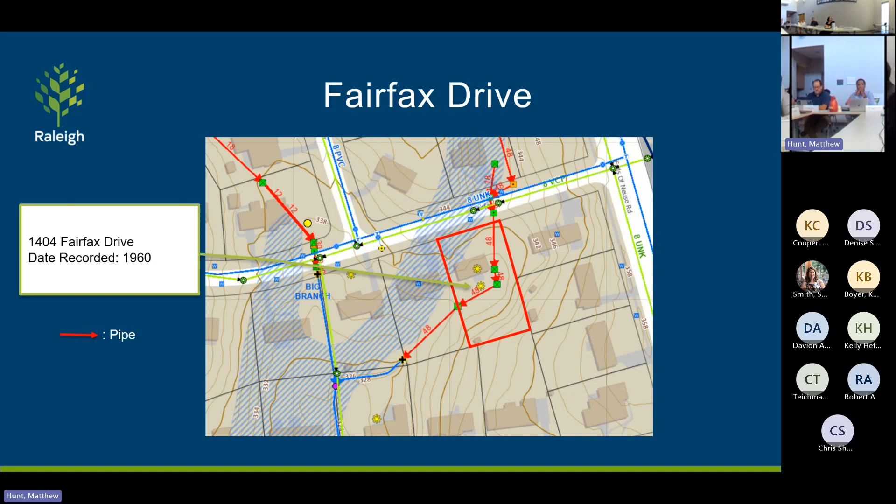Next we move on to 1404 Fairfax. We have a simple slide right here. Just a zoomed out look, the drainage basin is about 31 acres.

We are starting to meet every few weeks to see if there are low hanging fruit projects they can take on. Of course, we wouldn't do any of those projects unless we took it to you guys first, but just to know that we are looking at that as we continue to evaluate that plan and reduce the backlog.

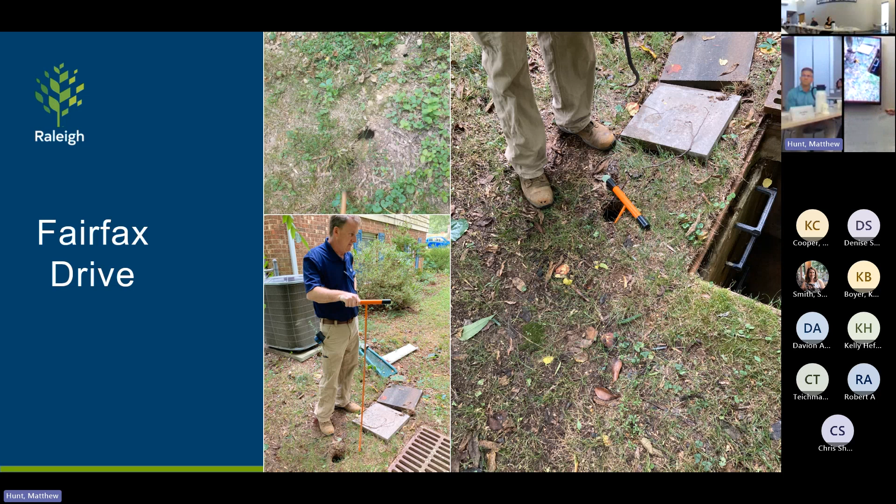Cause of the sinkhole, we believe, is coming off this roof drain. This is often covered right here, so the water has to go somewhere. We believe it's infiltrating there as well.

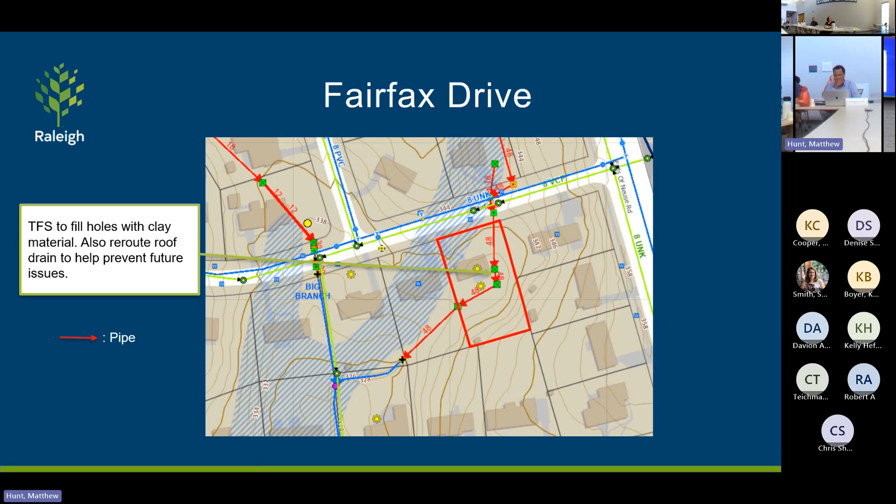So the solution would be to use our partners with TFS, grab clay soil material, and also reroute that roof drain into the catch basin.

As far as the scoring is concerned, we had Foxtrot, which had a sinkhole a little bit further away from the house, so you can see that the public safety criteria went up a little bit. Overall scores are generally the same, so it's fairly consistent with the scoring.

This probably will be the most simple, straightforward cost that I take to you guys. It is $5,000 because TFS has agreed to do the work. They have been out there multiple times. The $5,000 comes from the cost to survey a lot, based off our on-call surveying contract that we've had on a few other projects. They quoted that as $4,000, so I rounded it up to $5,000 as a little contingency in case something happens. They would secure the easement, and then TFS would do the work.

So with that, I'll stop for questions, comments, questions.

I had a question about the comparison to, I think it was Foxtrot, and the other. Let me just go back, yeah, to Foxtrot. I was just wondering why the water quality benefits with Foxtrot were so much higher, what the differences were in the approach there that made up for that.

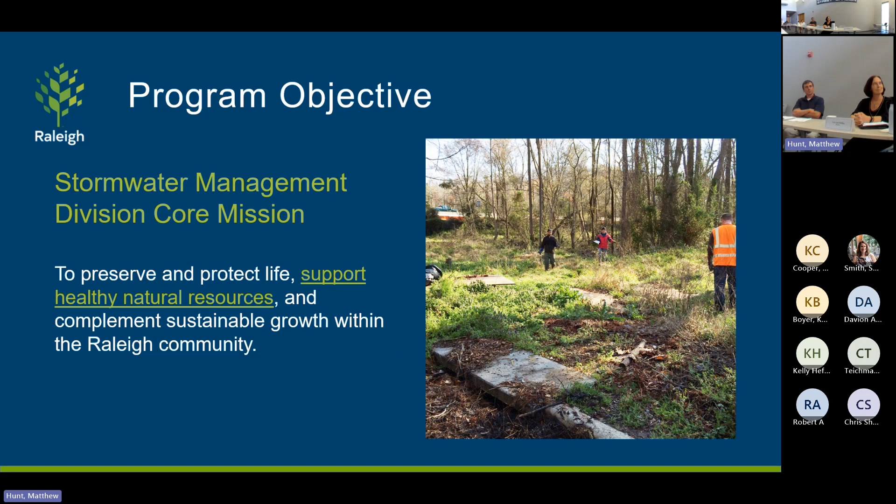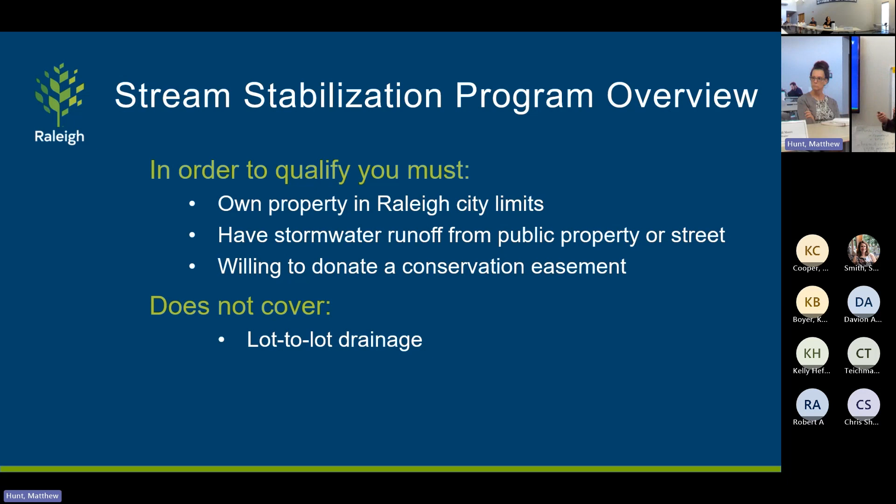The mission still applies to the stream stabilization program; definitely supports that as well. Again, this slide looks very familiar as the last one with the drainage systems. The one thing I'll point out is willingness to donate a conservation easement on the drainage systems. It's a drainage easement, and again, we don't cover lot-to-lot drainage.

We have $250,000 in annual funding. I will point out that we are working on that backlog of funding. You may recall we had funding approved for fiscal year 2023, and in that fiscal year we were working on developing the policy. We finally took a few projects, so we do have some backlog that we're working through in terms of funds. But with that, we're still approving about 5 projects per year that we'll take through. We'll see that in the last slide, some of that carryover of the CIP funds.

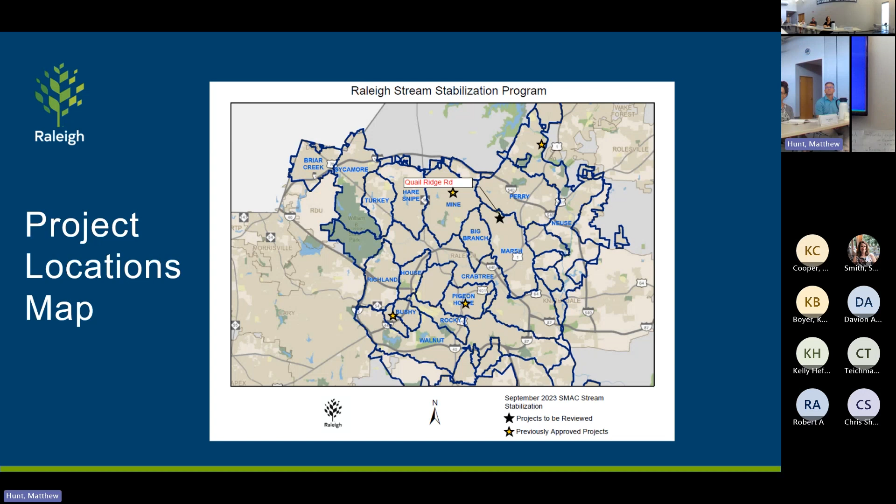Quail Ridge, this looks familiar, but this is just the stream erosion projects broken out. Now it's just separating out the stream project location maps, and you can see Quail Ridge northeast, a little bit west of US 1 in the marsh. We have 2208, which is on the bottom, and 2212, which is on the top.

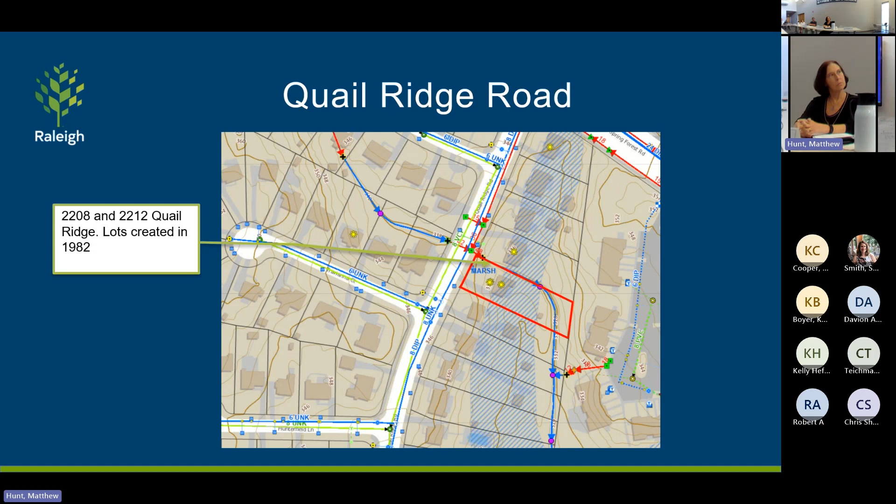We have stream erosion that is getting fairly close to the properties. It has increased throughout the years, not by a lot, but as we see with a lot of stream erosion cases: upstream development, increased impervious surface, increased water flows, increased erosion gets worse over time. You can see that this is a little bit southwest of Spring Forest Road, and again, an area that has developed a little bit.

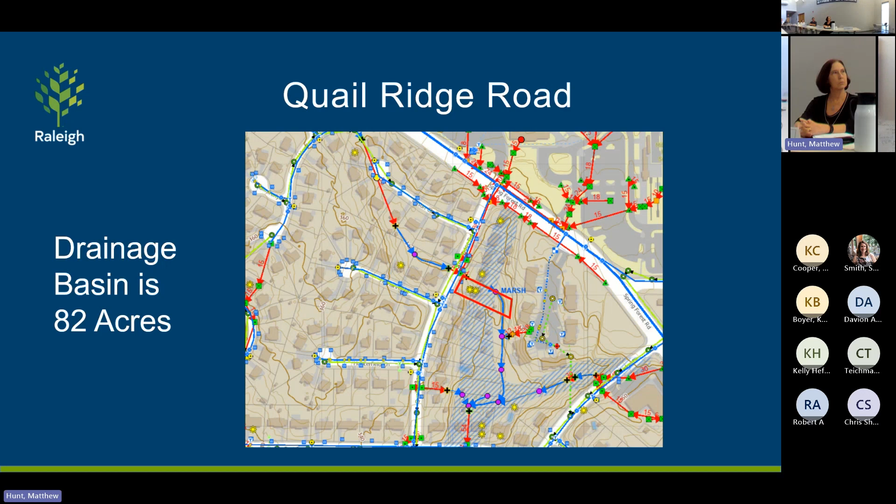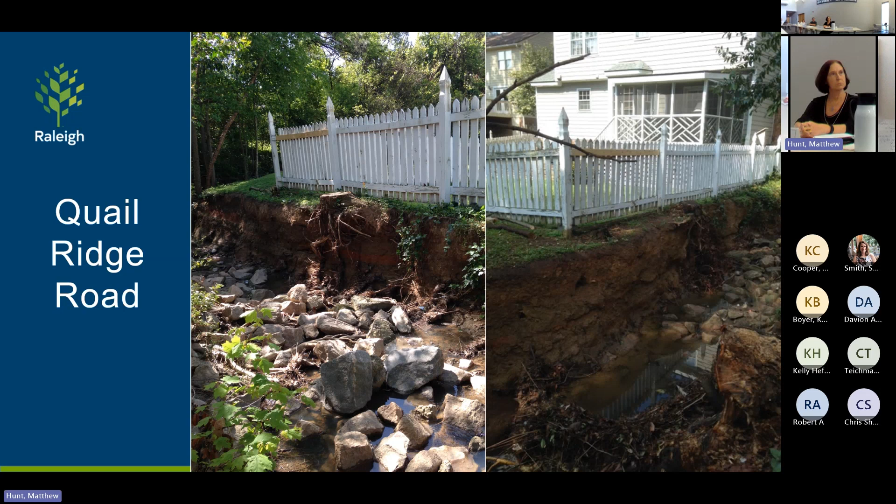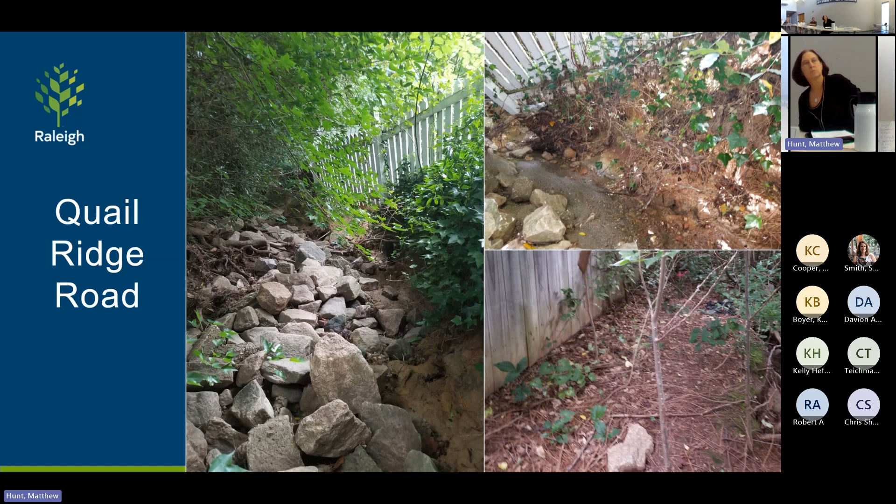But again, our main concern is the proximity to the home. Here's another look, this picture on the bottom right gives you another look to the other side, because both homeowners are willing to participate. And that's great, because one of the things we sometimes run into is there's only erosion on one side of the stream where both owners don't want to participate. I'm sure you can understand that when you repair streams, you want to repair both sides. If you just make repairs to one side, eventually over time you're going to have issues on the other side. May not be immediate, but it's going to likely happen over time.

So this is kind of a mix. We would prefer always to use slope vegetation, but if you saw those pictures with the fences almost falling into the stream, you're not going to be able to use slope vegetation at that point, because then you're sloping right into it. So armor with a retaining wall, riprap as we get closer to the house, and then there's some erosion going on downstream, which meets more of the intent of the program.

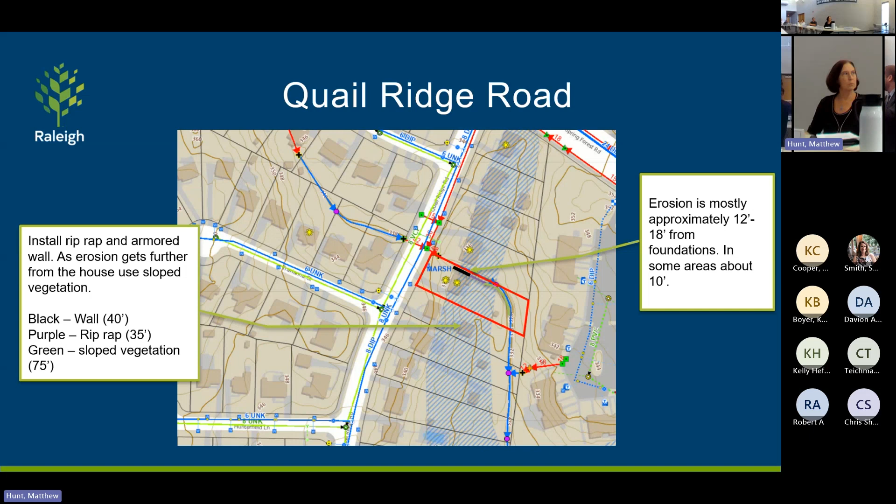When we took the stream stabilization program to you guys about 2 years ago, we also wanted to highlight the full intent of the program, and that was water quality benefits. So when you can pull back and use that slope vegetation, then you're also increasing the water quality.

So comparing this with Kelly Court, that's the one you may remember where they almost had the utilities falling in. Public health and safety is a little bit lower here, just because it wasn't as close to the home as that one. But there's still a significant public health and safety issue here.

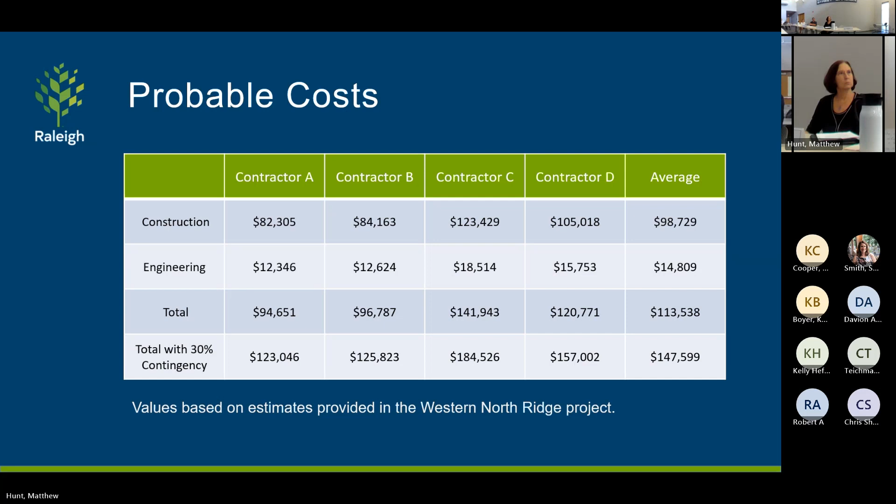So with that, I'll stop for questions, comments.